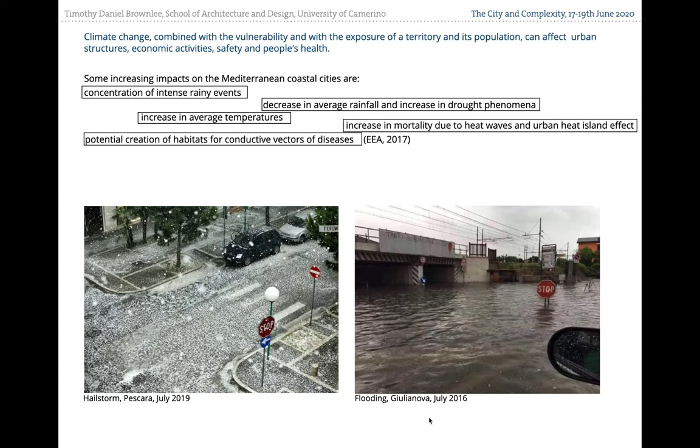Climate change-related events can no longer be considered extraordinary and localized phenomena, but should be intended as ordinary factors. The increase of events and the seriousness of some of them is convincing public opinion that mitigation measures will no longer be enough, and that for the future it will be necessary to identify a set of possible adaptation measures to be implemented rapidly and at different levels through development plans, financing, and shared strategies.

Among the European Union 2013 adaptation strategies, those that aim to make Europe more climate resilient, there is the Integrated Covenant of Mayors for Climate and Energy, made in 2015, which is based on specific and local data and local knowledge, and aims at developing sustainable energy and climate action plans, also known as SECAPs.

So the framework of this presentation is a project our School of Architecture is currently working on. It's called the Joint SECAP, and it brings together 9 partners that have in common the fact that they are all on the Adriatic coastal territories. There are 4 Italian and 5 Croatian partners.

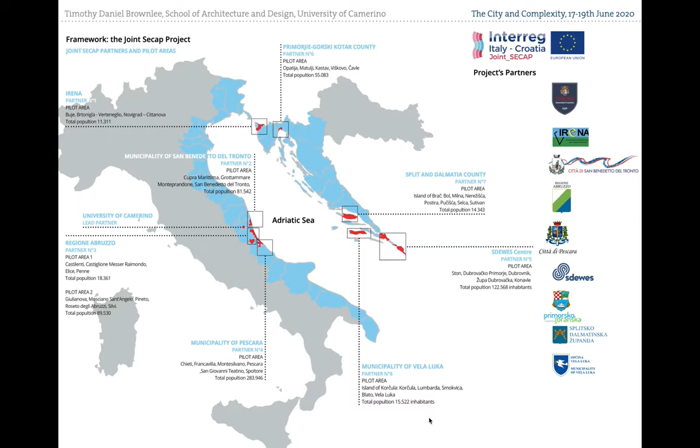Overall, we're talking about 700,000 people that live in the Joint SECAP target areas.

The main aims of the project are to raise awareness of citizens about the risks and about measures related to climate change, with workshops, seminars, websites, promotional materials, but also gathering data and making assessment of climate change through a web platform which collects data and which will be available for free for all interested stakeholders and citizens.

The main phases of the project you can see in this diagram. We are halfway through right now.

It begins in 2019 with context analysis of each pilot area, the definition of a common methodology for the development of risk and vulnerability assessment, the web platform definition, the definition of climate scenarios for each territory, adaptation options, and it will end with the joint action implementation, which is the main output: the joint sustainable energy and climate action plan.

We are developing right now the impact chains. The partners have several impact chains which have been developed through the shared methodology, which you can see right here. It's an 8-step methodology which will allow us to develop impact chains, identify and verify indicators, and weight and aggregate indicators.

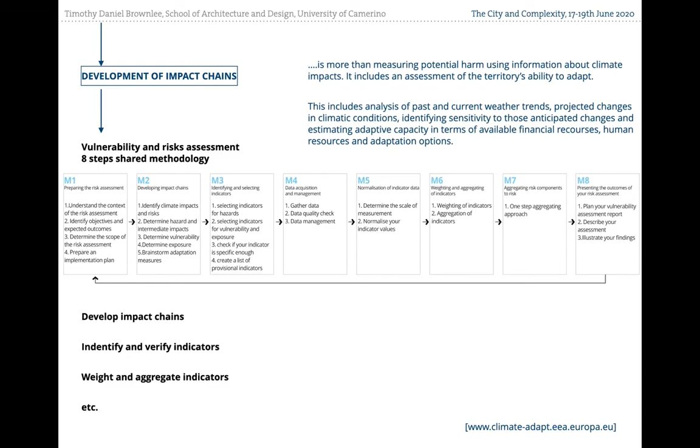So it's more than measuring potential harm using information about climate impacts. It includes an assessment of the territory's ability to adapt. This includes analysis of past and current weather trends, projected changes in climate conditions. It identifies sensitivity and estimates adaptive capacity in terms of available financial resources, human resources, and adaptation options.

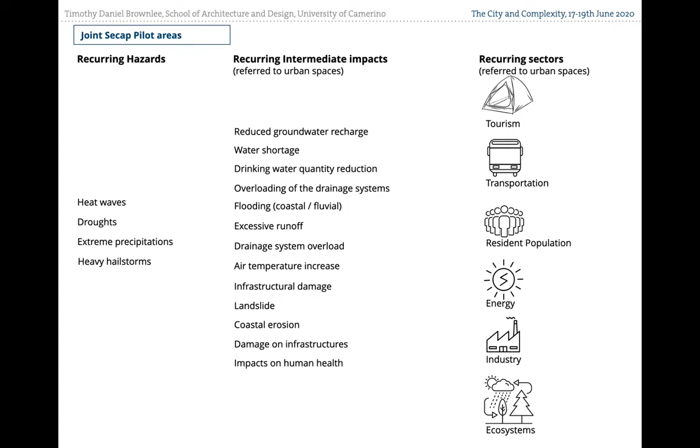If we summarize that data and focus on outdoor urban spaces, we see that the recurring hazards have to do with heat waves, droughts, extreme precipitation, and heavy hailstorms. The intermediate impacts include reduced groundwater recharge, water shortage, drinking water reduction, overloading of the drainage system, flooding (coastal or from rivers), excessive runoff, air temperature increase, infrastructural damage, landslides, coastal erosion, and impacts on human health. The recurring sectors linked to outdoor spaces are tourism, transportation, people, energy, industry, and ecosystems.

So why are we focusing on outdoor urban spaces? Because they can be considered a connective tissue for the community, a place of individual and social well-being, an expression of diversity due to their ability to support different social relationships, as well as a place of democratic health and active citizenship.

We also know that people are attracted to and spend more time in places that offer elements of interest, stimulation, and a certain amount of environmental comfort. There is a tight relationship between the quality of the space between buildings, as Jan Gehl calls it, and the presence of people and the type of activities they carry out there.

Spaces that are characterized and linked to the territory can constitute an element of local identity, strengthen the sense of community, foster collaborative practice, and enhance security and social cohesion. Outdoor urban spaces also play a key role for the environmental, economic, and social well-being of citizens, particularly because they create safety and social inclusion, but also because they expand possibilities of movement and thereby contribute to improving public health.

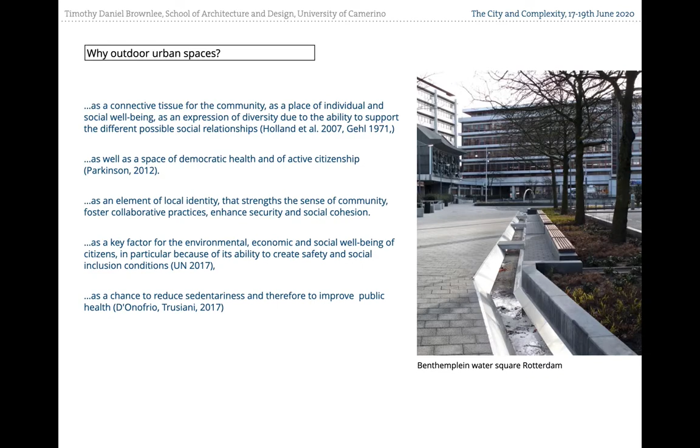So according to the risk and vulnerability assessment, the Adriatic coastal cities, like other coastal cities, have outdoor spaces whose usability can be at risk due to a series of variable factors, including the physical conformation, their position, and proximity to infrastructure and water bodies. The usability of these spaces can therefore be considered at risk.

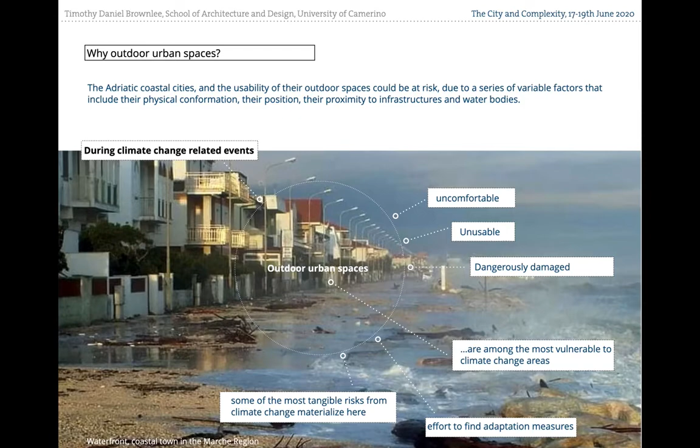During climate change events, these spaces can often become uncomfortable, unusable, or even dangerously damaged for a longer or shorter amount of time. Outdoor urban spaces are among the most vulnerable areas to climate change, particularly with flooding events and urban heat island events. It is through these spaces that some of the most tangible risks arising from climate change materialize, and so it is on these urban areas that we should focus our effort to find adaptation measures for the future.

The implementation of SECAPs and their transfer into ordinary territory planning tools can require a medium to long time to apply. But the adaptation challenge should be conducted on a long time scale. In the meantime, it is necessary to identify an interface that enables operational measures between the large and small time scale, so we are also working on a prompt range of possible intervention types that enable this link between the large and small time scale.

From the analysis of case studies, it is possible to identify a series of measures that are immediately applicable and that offer a set of implementation possibilities. You can find three main categories. One is retrofit interventions on open spaces, on plant systems and structures—those that need to be renewed since they have already been subject to climate change events.

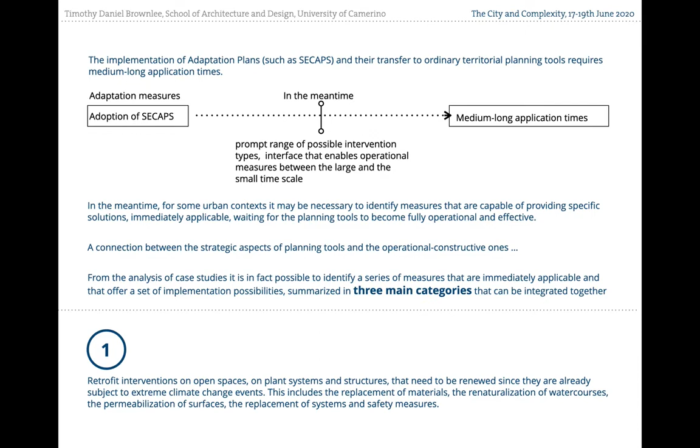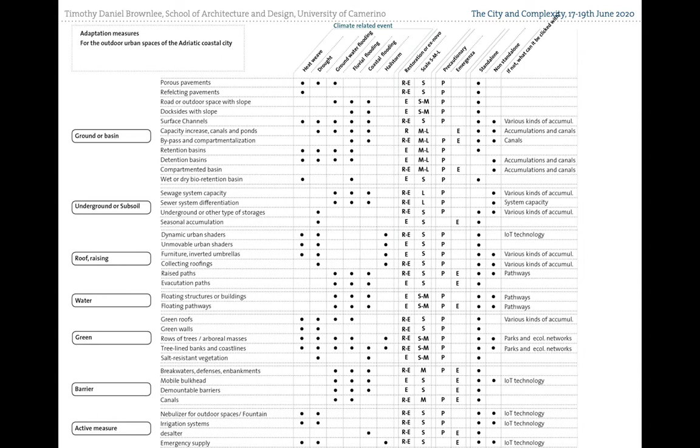This includes the replacement of materials, renaturalization of water courses, permeabilization of surfaces, and replacement of systems and measures. These adaptation measures can be found in this diagram. For each one, you can see if it relates to one or another climate event, shown at the top: heat waves, droughts, groundwater flooding, river flooding, coastal flooding, and hailstorm. For each one, you can also see if it is a small, medium, or large scale intervention, and whether it's a restoration or a new type of intervention.

The second category is the enhancement of the spatial conformation of outdoor urban spaces that have potential, considering that some urban areas can suffer impacts while other urban settings could reveal a great level of resilience and contribute to softening the effects of climate-related impacts. For example, the configuration of historic buildings and courtyards can provide protection against the urban heat island effect.

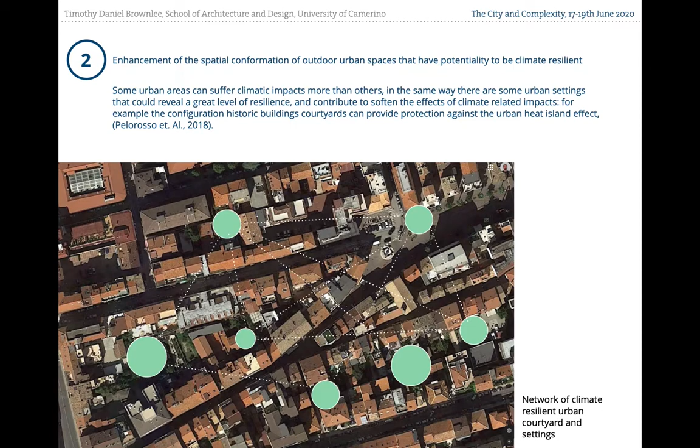It is necessary to start a reading of these potentialities offered by the cities and their possible networking, understanding what characteristics accentuate or mitigate the effects of climate modification. They could also be declined in relation to the potential of enhancing the internal and external relationship, for example, through the reconfiguration of ground floors.

The third one is small-scale interventions: devices, street furniture, temporary structures, shelters, floating pavilions, bike facilities, bus stops, interactive displays, lighting systems connected to the internet, capable of providing and enhancing information for urban users. These structures often have integrated sensors that detect air temperature, humidity, and polluting agents data in real time, spreading this information through interfaces or directly on the internet.

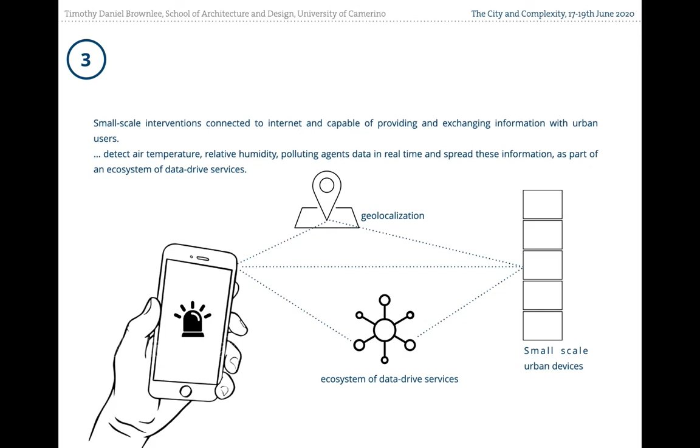They could be considered part of an ecosystem of data-driven services. They could be shelters that provide protection against climate events, sandstorms, extreme temperature, but they could also provide warnings and emergency information.

For example, we can imagine a new way of using the city through this small-scale intervention. The Rotterdam Floating Farm Dairy is an example. It provides a real solution to real problems, such as the food supply. We know that the amount of surface for agricultural land does not grow as the population increases, but rather it decreases due to the growth of urban areas and the effects of climate change.

The dairy offers a model based on circular economy. It generates electricity, collects rainwater, and makes it drinkable through special purification systems. But above all, it supplies milk to some supermarkets of the area. It is a floating building, temporary, capable of being rearranged in similar contexts, expandable, modular. It suggests possibilities for climate change adaptation for contexts characterized by increased rainfall, frequent flooding, or subject to sea level rise.

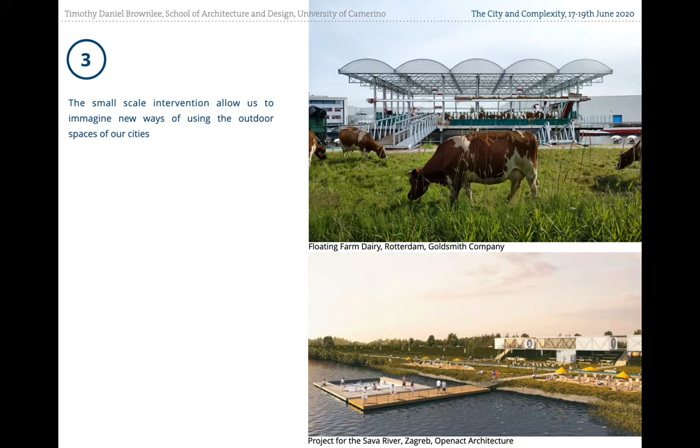The Openact Architecture project for the Sava River in Zagreb is also interesting because it shows how you can find pavilions and piers that have a twofold configuration: the non-flooded one and the flooded one.

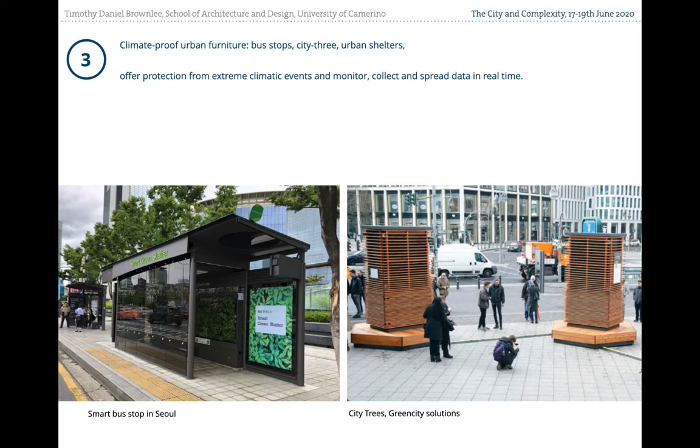Some cities are experimenting with new climate-proof furniture: bus stops, city trees, urban shelters that offer protection. City trees, for example, are nature-based structures particularly suitable for urban areas affected by heat waves and droughts. The presence of plants capable of absorbing carbon dioxide decreases external temperatures and controls humidity. These devices have peculiarities such as collecting rainwater, filtering it, reusing it, providing connection for electricity, and offering free Wi-Fi. In many cases, these are IoT devices that monitor air quality in real time.

Finally, it is necessary to highlight how mobile devices and wearable technologies can represent a further step in increasing the resilience level of individual citizens, particularly for the potential offered if they work in a network. For example, alert systems that use text messages to secure people in events of tsunamis have been in use for many years.

ICT is also already used as a connection network to send early warning systems and to disseminate safety and emergency information. The implementation of this type of technology through geolocated smartphones, increasingly popular even in remote areas of the planet, could be key. Not only apps that create awareness, but effective, active, interactive, connected tools.

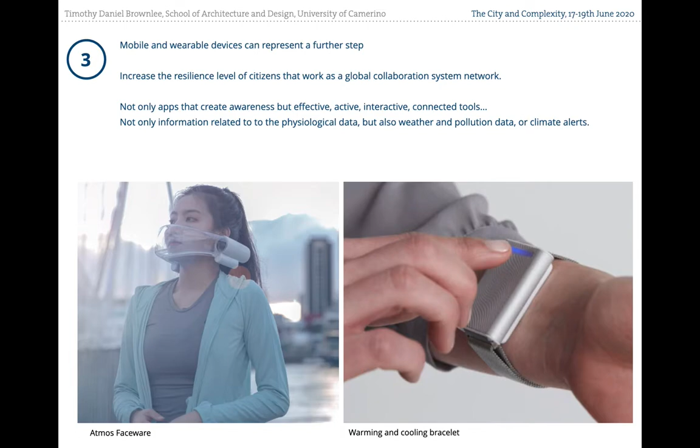The potential could be understood if you imagine these systems integrated with wearable products already found on the market. The ones you can see, for example, in these pictures, give information related to physiological data, but also to weather and pollution data.

So this presentation highlights how adaptation can be addressed on various scales, from urban planning to mobile devices and wearable objects. There is a wide range of possibilities on which it will be necessary to concentrate research efforts, including developing strategies that combine top-down actions from ordinary planning tools with bottom-up approaches referring to people's daily practices.

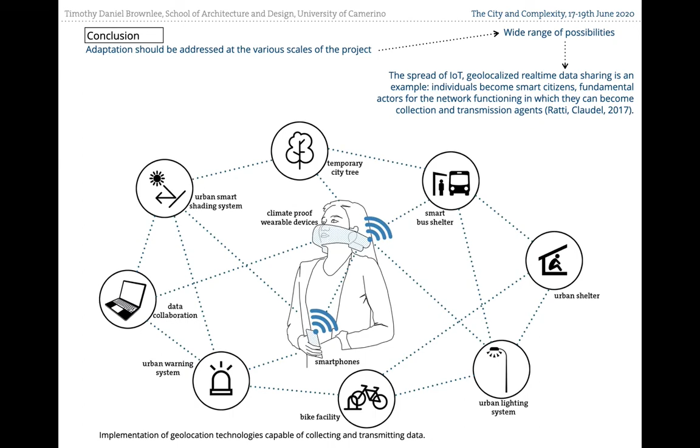New applicative and concrete possibilities emerge from the spread of information, from IoT, from real-time data sharing. Individuals become smart citizens, actors for the network functioning, in which they become collection and transmission agents. This contribution can provide a basis to support the creation of a framework of opportunities aimed at improving outdoor urban spaces, their equipment, their role, their usability, and enhancing their safety and accessibility in ordinary but also extreme event phases.